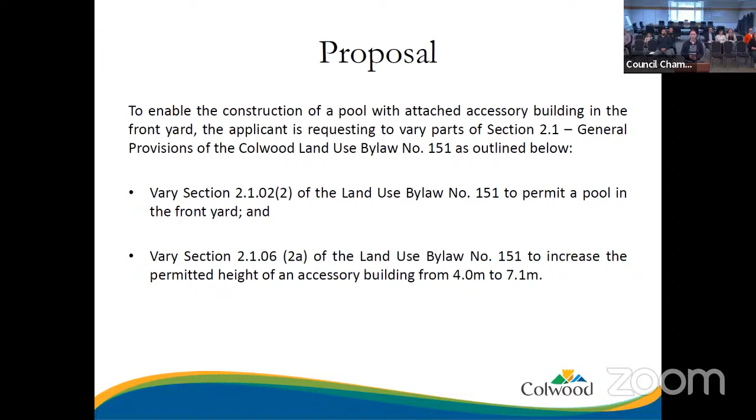So the subject property is located at 3341 Betula Place, as shown in the diagram here. This property is located in the Triangle Mountain area, which is mainly composed of single-family homes. The property is zoned residential 1 and is within the official community plan hillside and shoreline neighborhood land use designation.

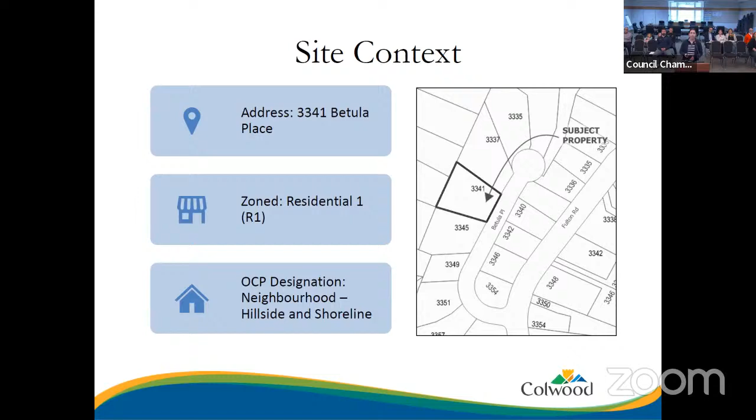So the subject property is also located within the hillside environmental and natural hazard steeply sloped development permit areas. These areas have guidelines that promote the preservation of hillsides and the integration of development with the natural terrain. If the variance is approved, a development permit would be required and the applicable OCP guidelines would be reviewed at this time throughout the process.

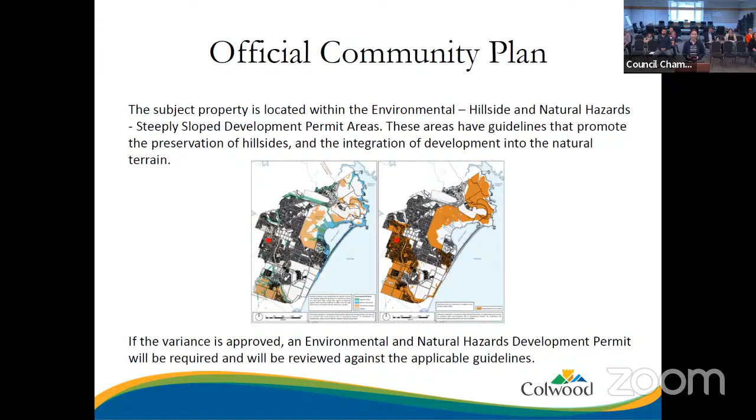So the land use bylaw prohibits the location of a pool within the front yard. The front yard is defined as the area between the primary building and the front lot line. On the subject property, due to the primary dwelling being located towards the rear, approximately 70% of the lot is considered the front yard. Additionally, the rear lot is largely composed of a steep slope.

The proposed accessory building is located within the front yard on a less steep slope, over 10 meters from the lot line. As the proposed building exceeds the 7.5 meter front yard setback in the R1 zone, staff have no concerns with the proposed variance to permit a pool within the front yard.

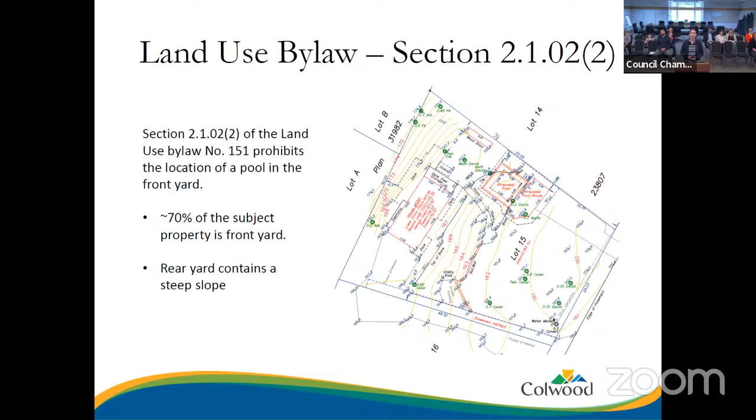The land use bylaw permits a 4-meter maximum height for accessory buildings in residential zones. The height is measured from the average natural grade to the midpoint of a sloped roof, in this case the pergola roof. So the accessory building itself is within this permitted 4-meter height.

However, the railings and pergola extend to 7.1 meters above the average natural grade. As the only features that extend above the permitted height are the railing and the pergola, and these have been designed to limit the visual impact, staff have no concerns with the request to increase the height of an accessory building from 4 meters to 7.1 meters.

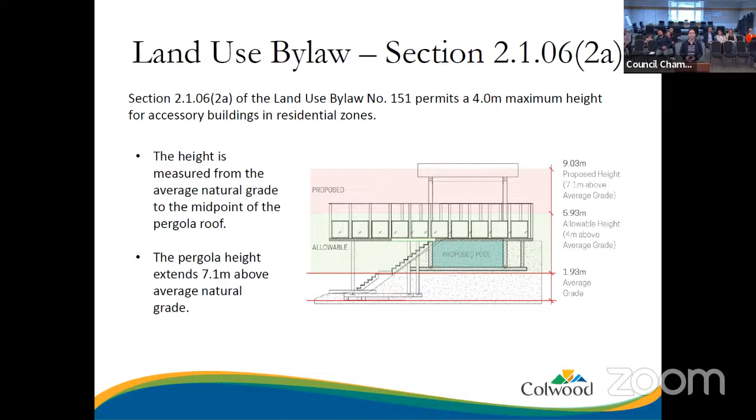So a development notification sign has been posted on the subject property. Additionally, notification postcards will be sent to neighboring properties within 75 meters in advance of the council decision.

Committee may choose to recommend to council the staff recommendation, which is to approve the 2 requested variances. Alternatively, committee can decide to defer the requested variances for more information, to recommend the variances are denied, or another option as determined by committee.

Thank you for your time, and I believe the applicant is also online to present to us well tonight. Great, thank you Kaitlyn. I think we'll go next to the applicant. I believe Evan Peterson, the principal of Barefoot Planning, is online here.

Welcome, Evan. Thanks, everybody. Can you hear me okay? Yeah, we've got you. Okay, sorry, I literally just came home from holiday, so I apologize for being a few minutes late. And I heard the presentation by staff, and it covered the vast majority of what I was going to say anyway. So maybe what I'll do is just share my screen and just reiterate a couple things, and then not belabor the point and pass it back over to the committee.

So I'll just skip through this as best I can and hit a couple of highlights, since this has already been mostly covered. My name is Evan Peterson, Barefoot Planning. I'm a consultant on behalf of the owner.

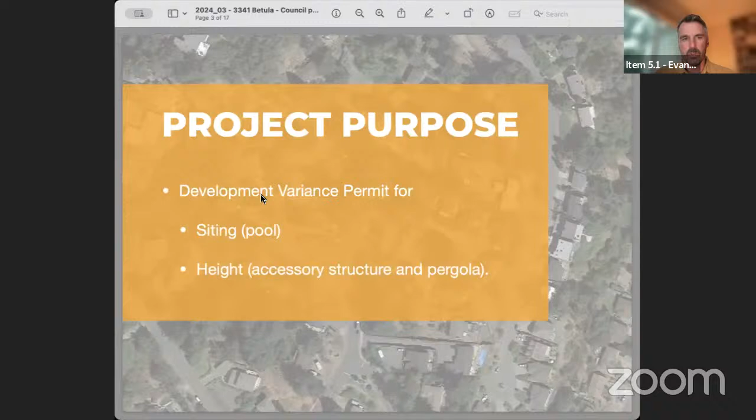I think you already covered the two variances we're looking for, as well as the site location, which is on Betula Place, a quite large site at 1,862 square meters.

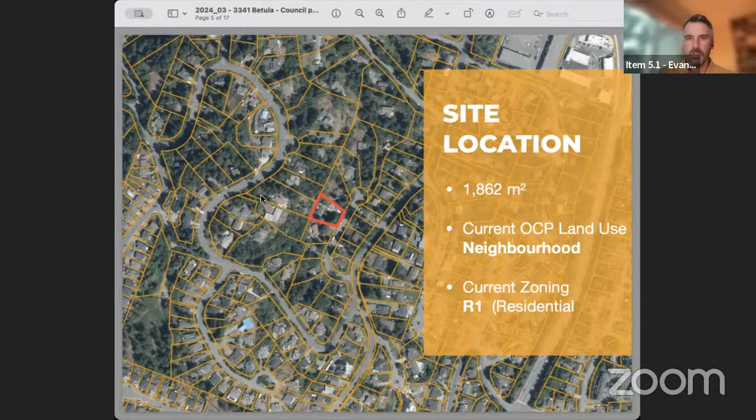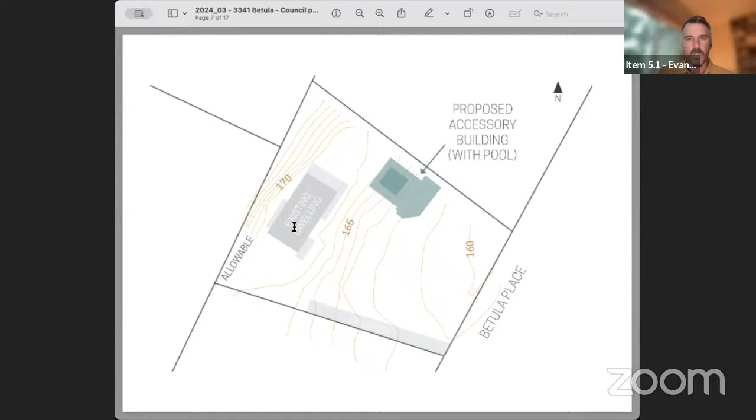Really, this can be summed up pretty quick on just the next few slides. The rear yard, where the zoning bylaw would allow this pool and accessory building, is very steep. It's a naturalized area, quite beautiful. You can see how far back the primary dwelling here in gray is located on the lot, so there's not really an option for locating the pool or the building elsewhere. That's the reason for the siting near, technically, in the front yard.

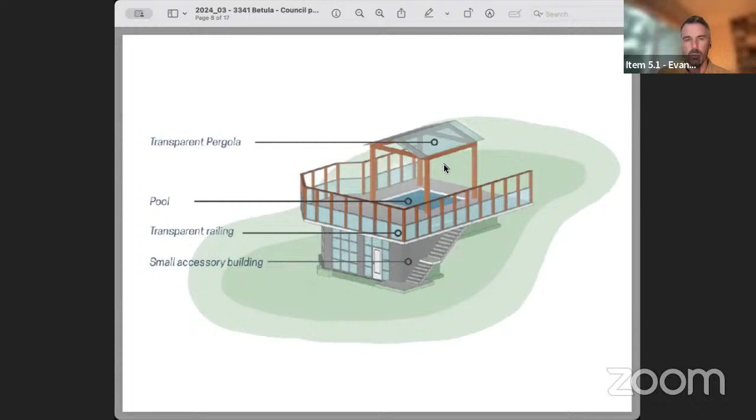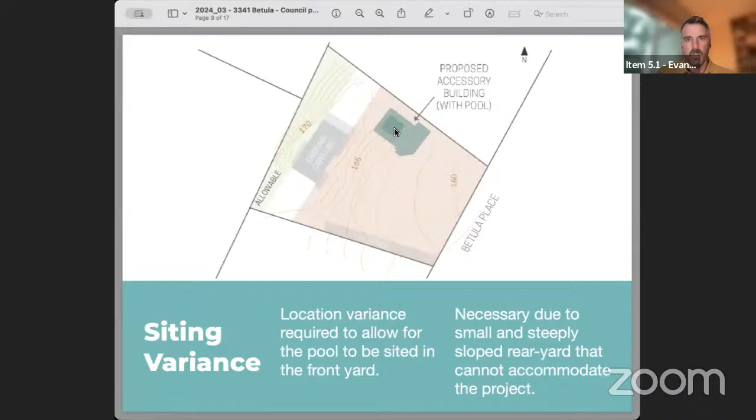Again, as already mentioned, we have the front yard location proposed for the accessory building and pool. In terms of the height variance, the average grade comes out at 1.93 meters, which is this red line here. The allowable height takes us up partway up the railing. I don't know if your graphic is messed up—mine's a little messed up too for some reason, this export, but I think you get the idea.

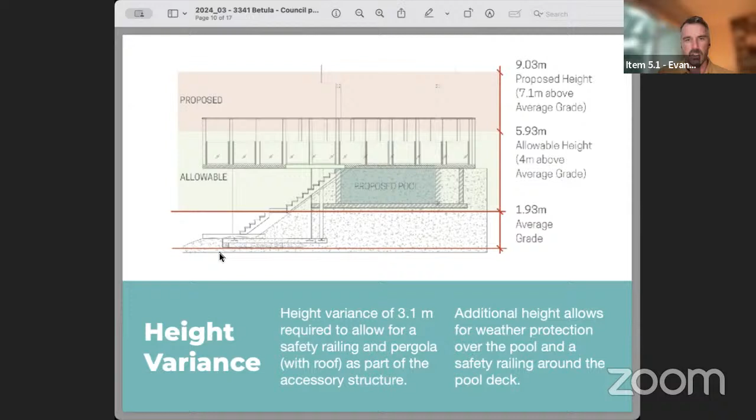And then the pergola takes us up to 9 meters, which is just for that portion of the overall proposal, not the building itself. The building itself is well under the allowable height, as is the pool. Actually, the pool deck is at the same grade as the side yard of the site, so it lines up quite nicely with the existing natural grade of the yard.

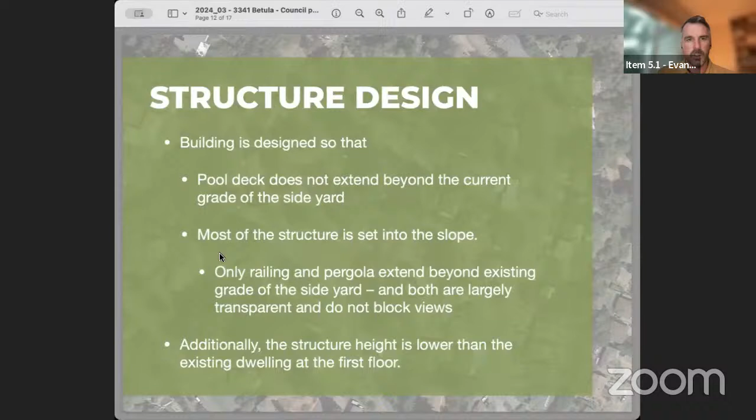The building is sited to take advantage of already disturbed open grass lawn area rather than the native vegetation and steep slopes in the rear yard. It's quite far back from the public right-of-way, despite the fact that it's technically a front yard, and there's no views being blocked by this from the neighbors.

Even the pergola—the top of it is still below the first story height of the primary house. So it's quite low on the site despite the need for the height variance.

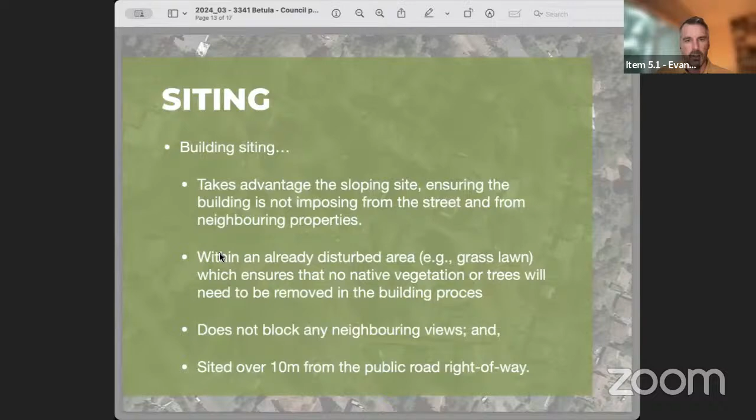The final two things I'll say: as part of our corresponding development permit applications, we've had an environmental assessment done by Corvidae Consulting, and they noted that this is entirely consistent with the DP guidelines and OCP policies, with minimal impact on the ecological elements of the site, maintains wildlife connectivity, minimal change to stormwater runoff, and no alteration to key environmental features.

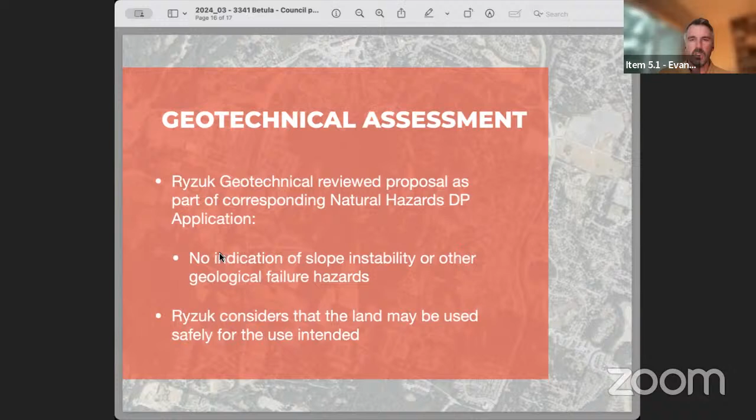And then finally, a geotechnical assessment was also done, and Ryzuk Geotechnical concluded that there's no indication of slope instability or other geological failure hazards with the proposal, and that they consider the land may be used safely as the use that's proposed.

So I'll keep it to that, because I don't want to continue repeating myself, and I'm here to answer any questions. Thank you very much. Thank you, Evan, appreciate it. I'd now open it up to the committee for any questions of either Evan or Kaitlyn.

First, Keener. Hi, thank you for your time. When I looked at the site over Google Earth imagery, it's pretty clear that there's been a fair amount of excavation that's pre-existing. So that brings me to a couple of questions just to familiarize myself with this particular area. Have there been existing variances, or is there a development permit—where are we in this process, since ground has been broken and there appears to be development in flight already?

So I wasn't sure if that's direct to me or to staff. Either.

So my client has begun some site preparation on the hillside, but no development permits. We're going through the development permit and DVP application process as we speak.

All right, and then the one thing that is definitely clear is the proximity to the property line on the north side of the property. Is there any variance required there, or will you be within bylaw compliance? We'll be within the bylaw for that one.

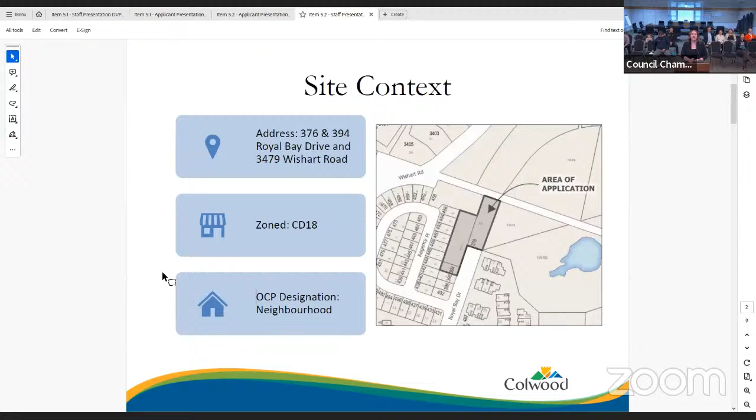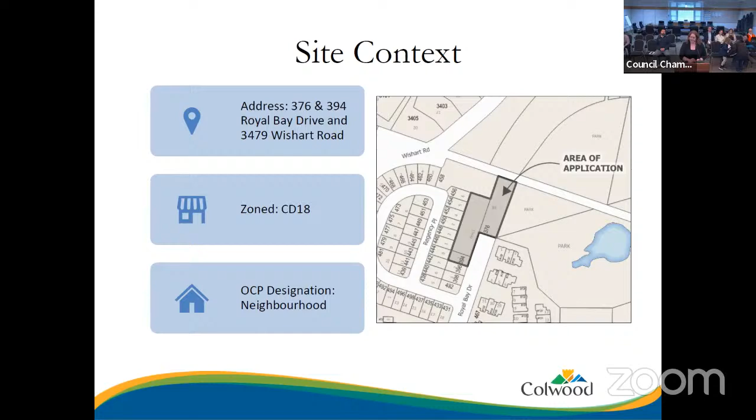Agenda item 5.2, rezoning 376 and 394 Royal Bay Drive and 3479 Wishart Road. The subject properties are located in the Royal Bay neighborhood with access off of Royal Bay Drive. The site gradually slopes down toward the rear to a city-owned right-of-way. The neighborhood is primarily residential with a range of built forms, including townhomes and a small lot subdivision. The properties are currently zoned CD 18 and are designated as neighborhood in the OCP.

The applicant is proposing to rezone to the existing RBCD 5 zone to enable a 27-unit townhouse development. The applicant is also proposing a placemaking and beautification plan for the city's right-of-way, and also has a development permit for the neighboring site at 3439 Trumpeter Street. There is public vehicle access through the sites via Royal Bay Drive or Trumpeter Street.

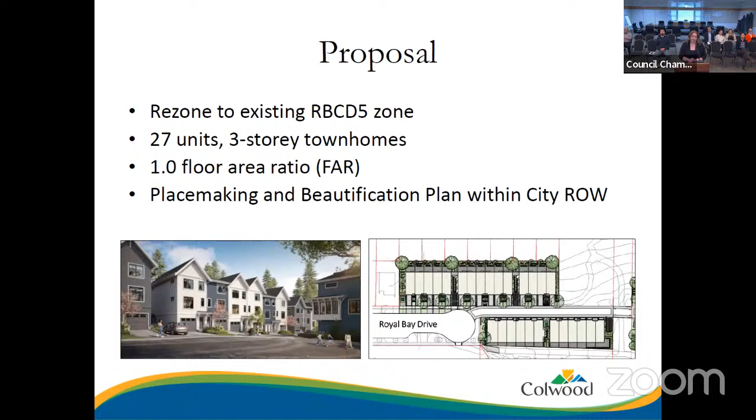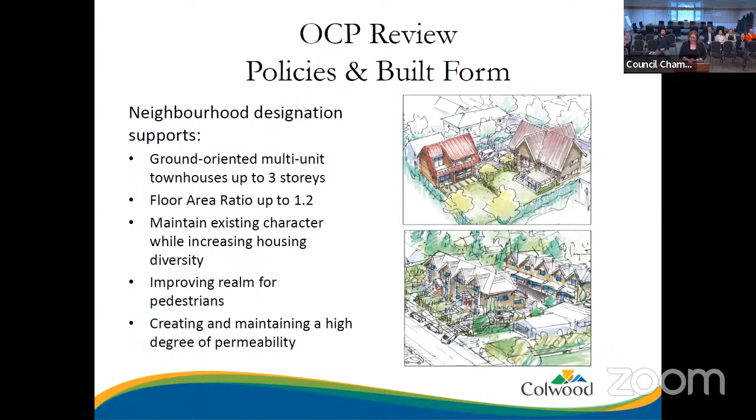The neighborhood designation supports ground-oriented residential up to 3 stories, including townhomes. The designation is also expected to maintain the existing character and scale of existing residential areas while increasing housing diversity. Other policies include improving the public realm for pedestrians and creating direct walking connections through residential areas.

The applicant has proposed a placemaking and beautification plan and worked with staff to activate the unused space by providing a decorative compass with a West Coast inspired mosaic, a little library, wayfinding signage, and other public realm improvements. The Royal Bay Local Area Plan in the OCP outlines policies that reflect a sense of place, and staff are of the opinion this submission may achieve those goals. A detailed plan will be required prior to development permit issuance as outlined in the development agreement conditions.

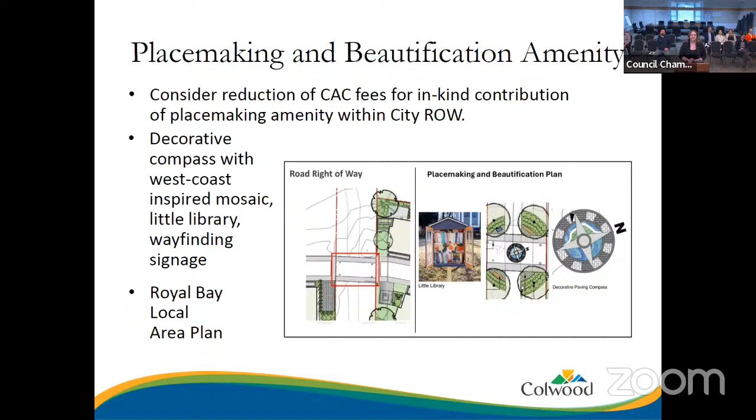Development notification signs have been posted on site, one facing Royal Bay Drive and one facing the city's right-of-way. Postcards and newspaper ads will be sent prior to considering readings of the amending bylaw.

Committee may wish to consider recommending to council that the required community amenity contributions be reduced by 50% to account for the in-kind placemaking and beautification plan. In-kind community amenity contributions are direct public benefit amenities provided by an applicant as part of a rezoning application, such as a plaza or public realm improvements on or around the subject property.

As outlined in the development agreement, the applicant will provide a cash reconciliation to the city if the placemaking plan is determined to be lower than the 50% reduction. The staff recommendation also includes green building features and a lot consolidation requirement.

Other options the committee may wish to consider include removing that 50% reduction, having staff provide additional information, denying the application, or another option identified by committee. I'm happy to answer any questions you may have, and the applicant is also here to present.

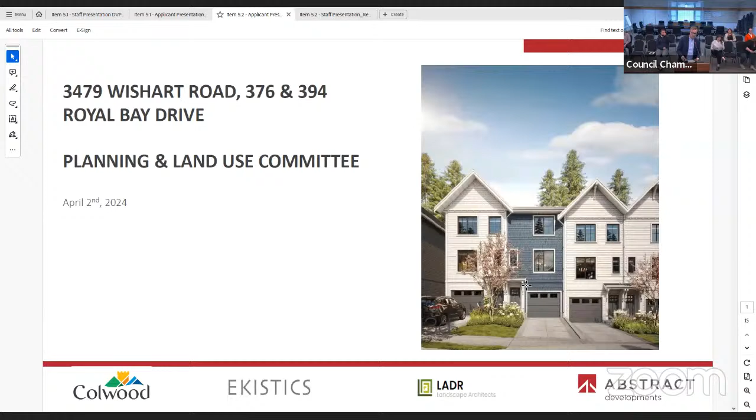That looks like it's on. Good evening, thanks for having us here this evening. We do have a short presentation. Both myself and a colleague will be presenting.

My name is Nicholas Standeven, VP of Development and a partner with Abstract Developments. We're really thrilled to share our application for our latest townhome community in the city of Colwood here this evening. Before we dive into the presentation materials, I'd like to thank staff for their support and collaboration with us on this application. We've really appreciated working with the wide number of staff, including Kelsey, and the communication effectiveness and clarity that staff have provided have been a huge benefit. Throughout the process, working with City of Colwood has been a refreshing and really positive experience.

To advance the slide, it looks like I just use this, is that right? Yeah, perfect, thank you. As I mentioned, I'm joined by a number of colleagues: Mackenzie Godfrey, who will be joining me here at the podium shortly, is a development manager and lead for the project, as well as Christy Irving, our development coordinator. With all of us here in attendance this evening, happy to answer any questions that might come up.

We also wanted to share a bit of an outline of the process today that's led us from our initial start with the project through to this evening.

We began our application process by hosting a number of online community engagement sessions in the spring of 2023, in order to gather feedback from the community and get a better sense of what people thought was important about the neighborhood and the character of the existing community. We found that an extremely helpful step.

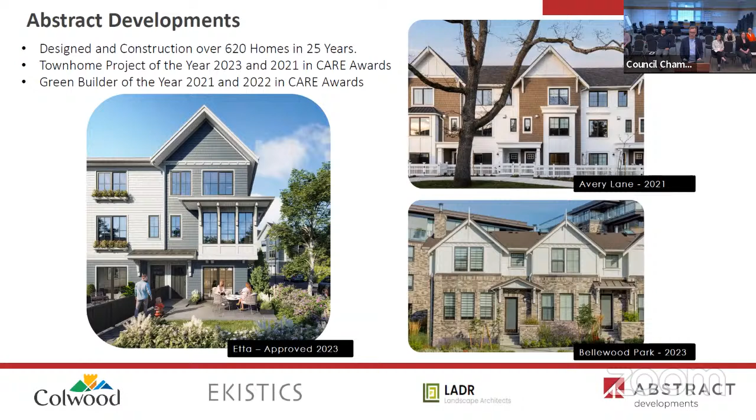Just a little bit about us. We have deep roots as a local builder with a long track record of building homes in the CRD overall. Over the last 25 years, we've built over 620 homes across the region. We've been awarded Green Builder of the Year a number of times, and we've won Best Project of the Year multiple times, including the 2 projects shown on the right-hand side of the screen. This is also our second project in the city of Colwood, with our first project named Etta, located just adjacent to this subject property at 3439 Trumpeter.

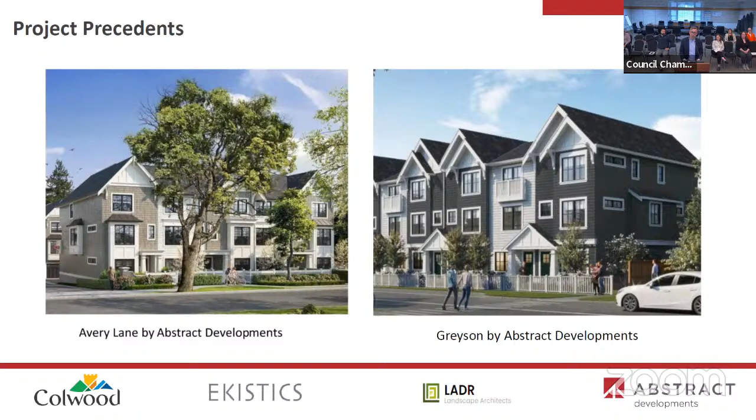We also wanted to share a few precedent images this evening before we get into the main presentation. On this slide, you see a number of our past projects that are either completed or underway, and also 2 projects from the architectural team, the designers behind this design, really just highlighting the high level of detail and building articulation and overall spirit of the architectural expression we're hoping to achieve here at this subject site as well.

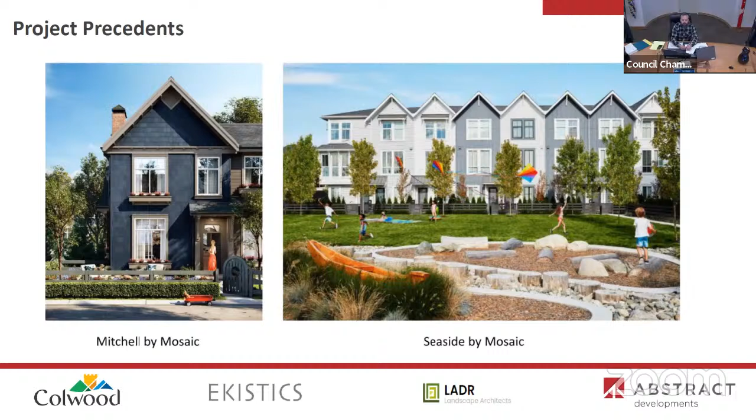So with that, I'm going to turn things over to my colleague, Mackenzie. Thanks again. Push the button. Okay, and push this button. There we go. Thank you, Nicholas.

This site is located within the community of Royal Bay on the edge of the Meadows neighborhood and is made up of 3 individual vacant lots. This area is highly walkable and rich in natural amenities and recreational activities. The newly created multi-use pathway is located adjacent our site and directs pedestrian traffic to Murray's Pond Park, the Northridge Trail, and through the rest of the Royal Bay neighborhoods. There are 3 transit routes close to the site within a 10-minute walk, as well as commercial amenities and Royal Bay Secondary School, a 4-minute drive or approximately 20-minute walk.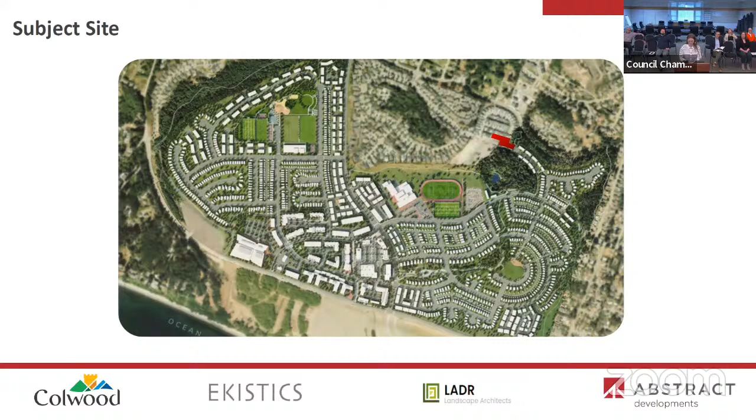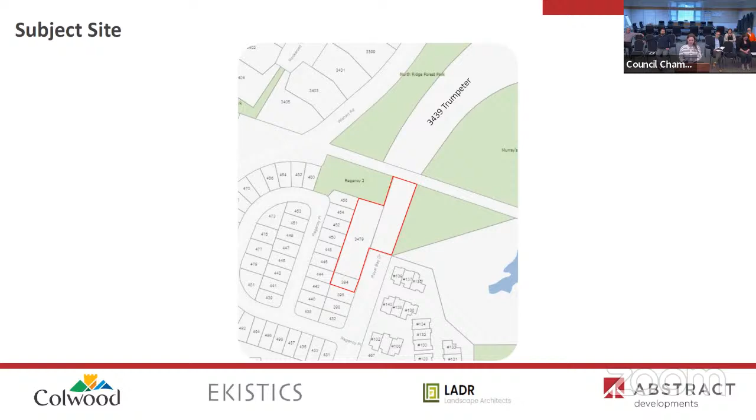This is a more zoomed in view of the site. So you can see Murray's Pond Park to the southeast and then Northridge Park to the northwest. There's also existing single family residential adjacent the site, and just down on Royal Bay Drive is some multifamily attached residential housing as well. So it fits contextually within our proposed development, maintaining the existing character of the neighborhood while also increasing housing options for the community.

Into policy context, our request to rezone the site is consistent with the neighborhood land use designation contemplated by the OCP, which supports ground-oriented multi-unit residential. As you will see, we are also aligned with the Colwood strategic plan by integrating elements such as placemaking, frontage improvements, and pathway connections. These are designed to help promote family-friendly neighborhoods, improve public safety, social connection, and regional connectivity. Another key benefit is the delivery of 27 homes, which provide more diverse and affordable housing options in the neighborhood for families, downsizers, or even first-time buyers.

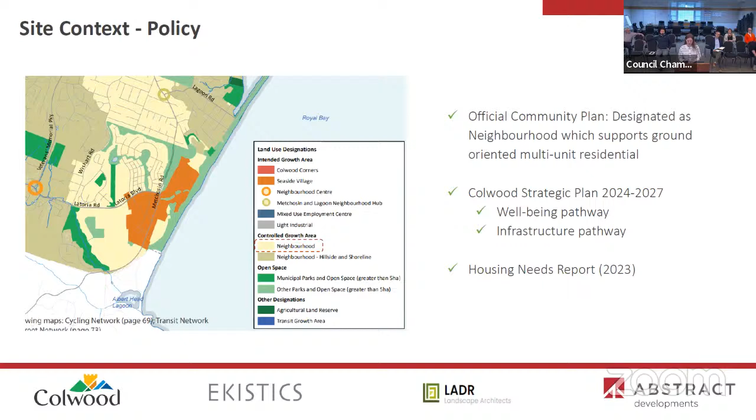So I talked about the greater neighborhood context. As Nicholas mentioned, we have our Etta project adjacent to the site, which is currently in the building permit phase. The 2 projects are visually related and connected and share a similar design language. In fact, we've engaged the same design team for this project as well to ensure continuity and a seamless transition between both sites and between neighborhoods as well. Located at the center is a future road connection intended for emergency vehicle traffic only. This was a big desire from community and staff, and we have also treated this area, as Kelsey mentioned, as a public amenity. We'll go into a bit more detail about that shortly.

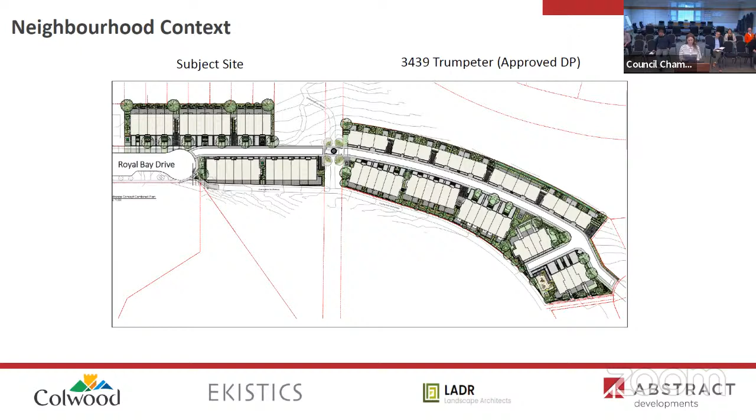For our proposed site plan, we're proposing a collection of 27 homes, with 3 bedrooms on the upper floors, and some homes will offer a flex space on the lower floor, possibly a 4th bedroom option. Each home will have 2-car parking through a mix of apron, single car garage, and double car garages, adding differentiation in both appearance and housing options.

This also reduces the amount of visible parking on the exterior and achieves realistic parking needs for homeowners. Each home will have a level 2 electric vehicle plug-in and bike parking, and concrete banding through the strata lane will provide visual delineation and a safe path for pedestrians.

We have tried to maximize tree and shrub plantings throughout the site to bring biodiversity and net positive canopy gain back to the site, as it's currently pretty much a vacant parcel. We are proposing native and adaptive plantings and layered landscaping placed thoughtfully throughout.

In terms of environmental performance, we are committed to achieving the targets set out at the time of building permit, which we anticipate to be Step Code 3 and zero carbon Step Code emissions level 4. Homes will be equipped with energy efficient heat pumps and be sprinklered throughout.

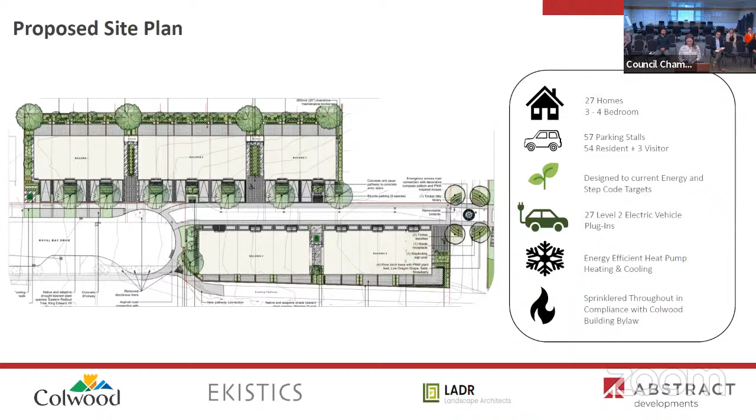In collaboration with Parks and Engineering, we have proposed a number of frontage improvements that we feel will improve the lives and safety of the community. You can see on the image on the right the current condition.

These improvements will also address some of the concerns and wishes from the community for more bench seating, more connection, and improvements to the flow of traffic. A large cul-de-sac has been incorporated to allow for safe turning of vehicles.

The sidewalk has also been extended around the cul-de-sac and connected to a new pathway connection for the multi-use pathway, which is widened for pedestrian and cycle flow of traffic. Bike letdowns, timber bench seating, landscaping, trees, and an entry monumentation have also been incorporated into the proposed design.

So as you drive down Royal Bay Drive, it doesn't really feel like an end of road condition, but more a beautiful, inviting transition from public to private realm.

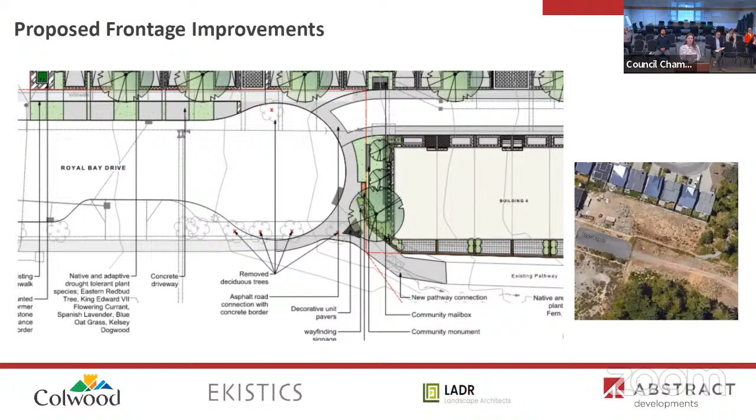There's a municipal right-of-way between our adjacent project and this project, and to mark the significance of this location, we are proposing a substantive placemaking package.

I know Kelsey has provided a bit of an overview, but I wanted to touch again on this exciting part of the application. Through collaboration with planning, we wanted to create a West Coast inspired space that enhances social connection and celebrates this location as a point of convergence.

At the heart of the plan is a nautical compass designed with decorative pavers and a striking mosaic inspired by the Pacific Northwest. A north directional arrow was added to create a both functional and playful feature that allows people to stop and interact with the space and appreciate it.

Removable bollards will permit emergency vehicle access only, allowing the space to be enjoyed at the pedestrian level, while also maintaining safe travel along the Northridge Trail, which was important for the community.

We have also incorporated timber bench seating areas, interactive nodes complemented by rounded edges and softened by trees and plantings. We really wanted this space to feel inclusive and welcoming to attract passersby to stop and enjoy the space. Other elements include a little library for the community to exchange books and directional wayfinding to the surrounding trail networks.

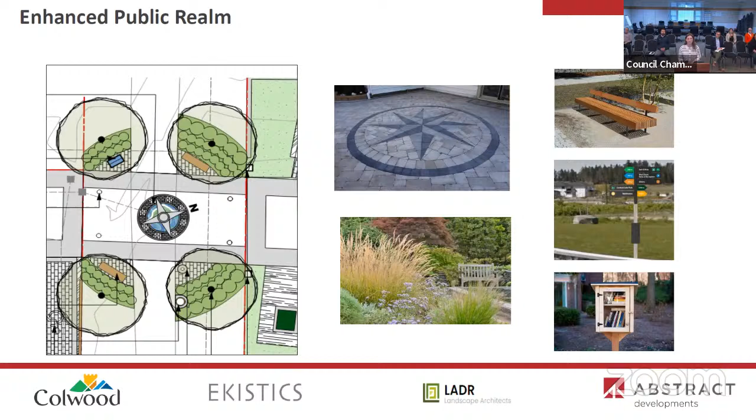We've treated the side of building 4, which is at the end of the cul-de-sac, as a perceived frontage to create visual interest and mark the prominence at the entry to the development.

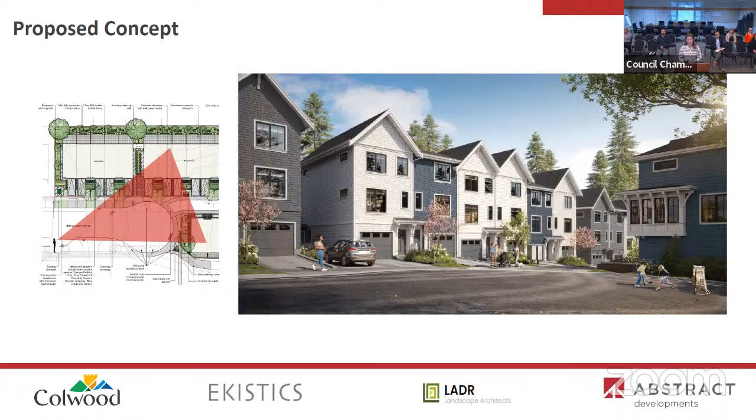We hope that you can see we have put considerable effort into designing an attractive application for this beautiful location in Royal Bay. We have done our best to respond to the community and staff input, as well as direction from the OCP, strategic plan, and broader needs of the community in terms of providing new housing options.

Great, thank you Mackenzie and thank you Nicholas. Appreciate the information from you both. And before I go to questions, I thank you for your comments about the efforts that staff have made.

I too have heard some great things of late from people in the community and have been remiss in passing it on, but our CAO is in the back there, so he's heard it all now. I think that's something we should take note of, that not only do you put a great deal of work into this, but staff work alongside you with that. So I appreciate you recognizing that. With that note, I will open it up to the table for questions.

We are breaking protocol here, and I'm going to Councillor Jansen first. A few things. I like the design. It's very interesting, in no particular order.

I like the trail access. I see one of the connections. I had some questions, and now I see it between the buildings there. There's a connection that heads up towards Wishart Road in between the two developments. The Northridge Trail, yeah, so I see that now, because that was one of my questions. But can you speak to that? I take it that'll be fully public accessed. It'll belong to us kind of deal. It's a right of way through there.